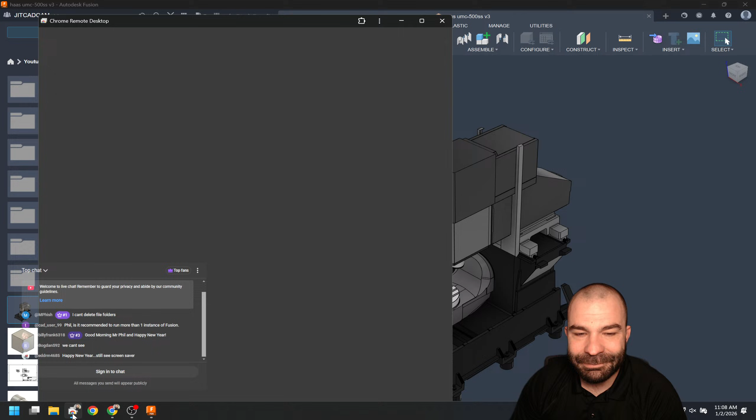I can. So I'm going to start off with the desktop connector. I use Chrome Remote Desktop, I like it, it works really really good for my application. What you're seeing right now is my second computer that I have set up, and that is a workhorse versus the laptop that I normally work on. I can connect to this thing anywhere and everywhere. So you would need 2 licenses of Fusion to do this because you are on 2 separate computers at the end of the day.

Bogdan, thanks for pointing that out. Billy, Happy New Year's. Ed, Happy New Year's once again.

I'm going to leave this open for you guys, I don't have much going on my end. Let me go ahead and get my ticket system pulled up because I don't know if Mike is out there. Mike was messaging in wondering about roasting his setup. But Mike, if you're out there, feel free to send us the file. Back to it guys - any questions, any comments, any concerns, anything that you would like to see? We are here for you.

That's right, I forgot - Fish, you want to know about deleting folders. So if I create a brand new folder, as you guys are going to see, that is now the folder that we want to delete. If I right click, there's what's called move to trash. So Fish, if you don't have the move to trash button, I would tell you we need to open this on the online viewer. Give me a sec here, guys.

I just saw somebody pop in with a question. Now you could see I'm on the online viewer, and this is where we could go in, find that folder that we wanted to delete, and then we could trash it here as well. So you're going to see me move it to trash. Now, if you're the admin of your team, guys, you have access to the trash at any time, and this is where you could go back and recover bad choices that you made along the way, like yours truly. So as you guys can see, I could go in at any time and I could retrieve deleted files.

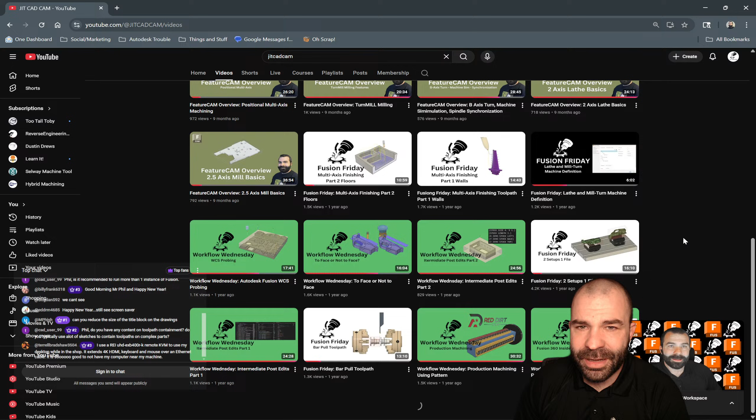I know it's in here, we're going to find it. I do have a video on it for whoever was referencing it. I'm going to try to grab that video and throw it in chat for you guys. Got to remember what it was called, it's been a while, maybe we have to recreate it. Let me go ahead and get OBS pulled back up so I can see you guys in chat.

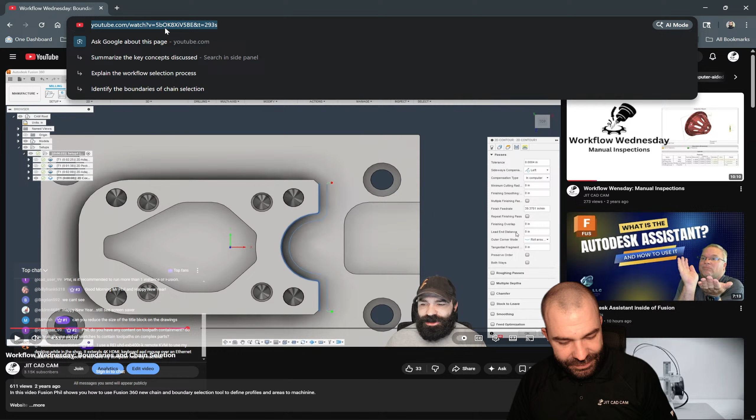Where is it here? Boundary and chain selection. See, I knew I had a video on this. Let me grab this for you guys. See, I can't spell - boundaries, not boundary, boundaries.

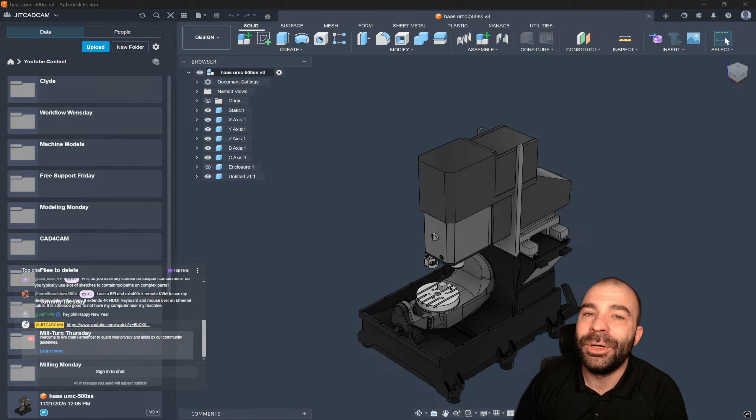Terrell out there says he's using a KVM to use his desktop while in the shop, an extended 4K monitor and mouse. Terrell, I have multiple of those in my house too. Basically what's happening is he's using little dongles you can get from Amazon to run your keyboard inputs and your display from a remote location. Now Terrell, my only opinion about what you're doing is you have to hardwire the system versus using a tablet and a desktop connector - that's my old thing. Run it over Wi-Fi, make your life a little bit more easy, right?

So let's go ahead and look at a drawing and let's see what we can come up with our title block changes. So as you guys are going to see, we're going to go ahead and put this on none other than inch setup. There we go, yep.

The nice thing also, Terrell, again this is just me - let me back up. The bad news is when you're doing remote desktop connections is the fact that if you're posting programs to a thumb drive, that thumb drive is on the computer in your office, right? I just want to make that clear to you. Now this is why we would say network your machine, or you could do a share folder from your desktop over to your actual laptop. And again, that's something I have done here at the end of the day.

If you guys wanted to see this, is if we go into my network, I have my desktop right here. And this way I can connect over to the desktop file repository, and then I could copy that here to my laptop if I had to move that file across the way. Again, if it was me guys, I would just network my machine, it'd be 1,000 times easier.

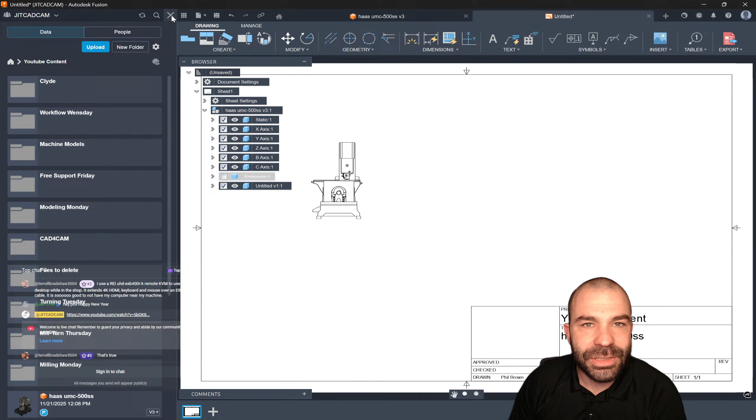So, title block - as you guys can see, we're sitting here looking at a normal setup. Now as you guys are going to see, we can't go through - we could change the things in our title block, but if you're looking to make your title block smaller at the end of the day, what you really need to do is create your own drawing template.

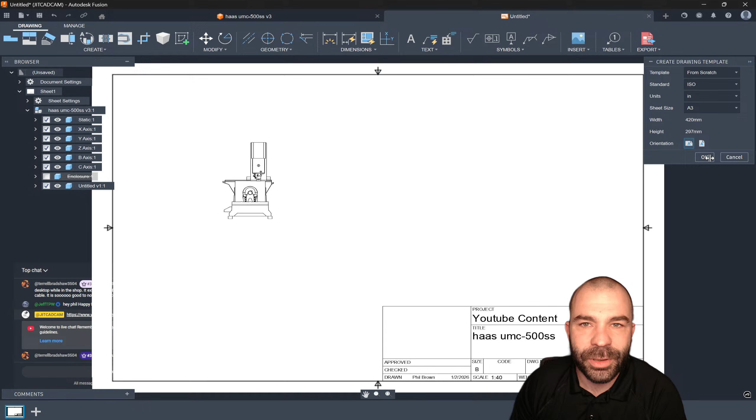So what I'm going to do now is I'm going to say new drawing template. As you can see, we can define our sheet size, whatever size that's going to be. Again, let's get to the American sizing. And with that, this is where you have full range over converting your title block, changing the size of your title block, anything and everything that you're going to need for your actual setup. So again, we could do from existing, or you could go in and go from scratch, or you can import one, all 100% on you.

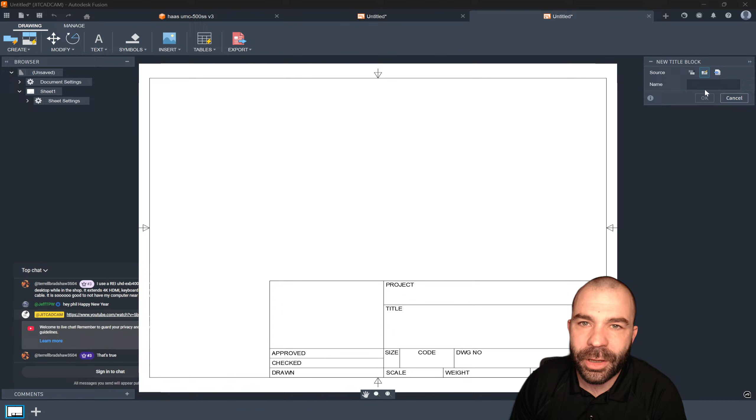As you guys can see, I'm now in the test area to create a title block. Let's say I want to make a box like so, box like so. I'm not going to get too deep in the weeds on this guys - one of these days we'll make some videos on this, but you could go through, add your text. Again, these can be based on parameters if you wanted to call parameters or standard tolerance.

Plus or minus 3, right? And as you can see, I now have my own title block to be able to utilize. So based on that information, my title block is massive because I drew it too big. Had I drawn it smaller, it would have made much more sense.

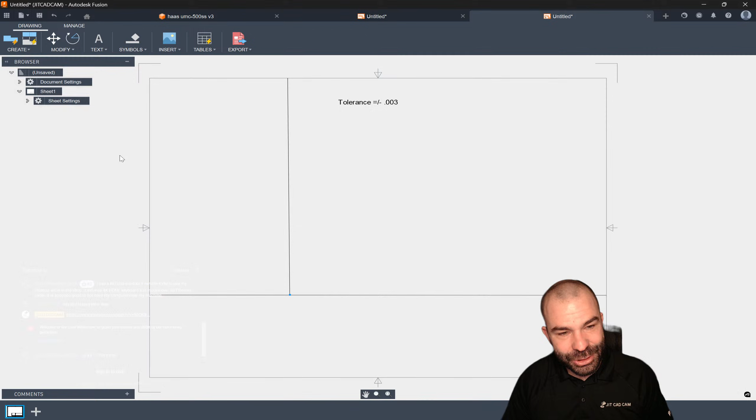So maybe I go back. I'm going to undo this. We should be able to back out of this. What I really need is these lines to be much smaller. Let's go ahead and delete those two. Maybe we just do a rectangle. And what you guys are seeing is this is my sheet size in the background. So something like that, do this one a little quicker because we all know how much I love rectangles.

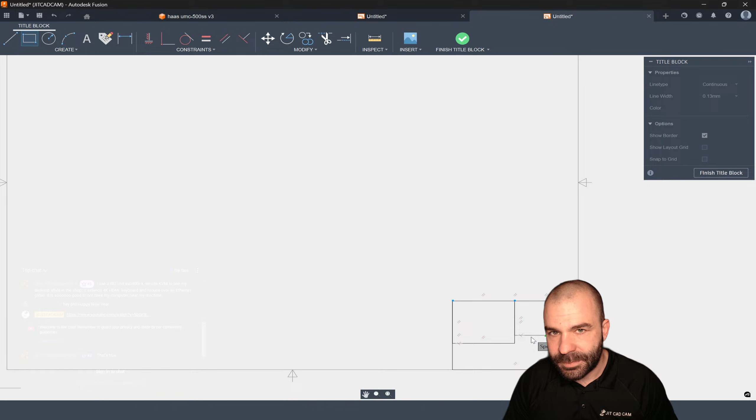There you go. And now you can see I have a much smaller customized title block. So Fish, let me know, does that help you out?

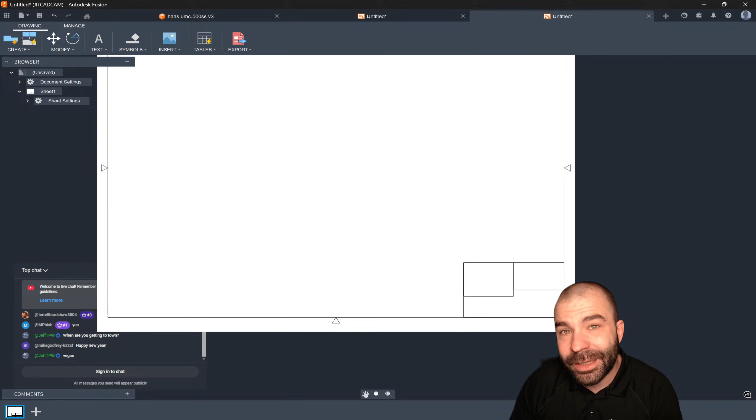When are you getting to town? Jeff, are you in Florida? Happy New Year, Mike. Mike, you made it. Mike, are you going to send me files? Oh, that's right, Jeff, I forgot about that. I don't know if I'm going to make SHOT Show, it's still on the table at the moment. Jeff, if you want me to come do a couple days of training, I'm not opposed to you cutting me my favorite thing, which is 2 blank checks. Second favorite to Busch Lights, of course. It's still up in the air, Jeff. I don't know if I'm going to go to Vegas or not this year for SHOT Show. You guys, if you didn't know, SHOT Show is in 2 weeks.

You can send it, Mike, if you're doing so real quick, and for anybody else out there, if you guys want to send us a file, there's 2 ways to do this. One, you can go file and export. This is going to be an Autodesk archive file, and then send us that file via the support email down below.

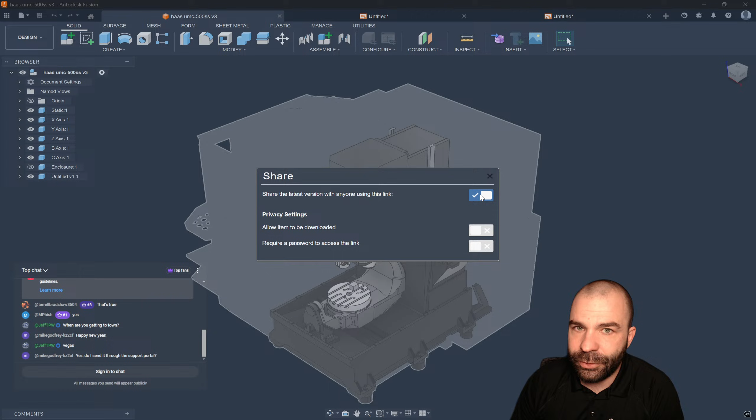Or you can do what's called a share file link, and make sure you turn it on so that it can be downloaded. As you can see, I have download turned on, and then you can copy this link. Let me know guys, can you put links in chat?

Fish out there, great question. If you have a machine with a 17 tool mag, but your tool library says 50 tools, can you renumber tools but keep the H value of said tool? We're going to go ahead and take a look at that here in a minute.

So Terrell, I feel like I get this question so much. I got to say, this is probably the number one question, about ITAR compliancy. I have not heard anything, and full disclaimer guys, don't make any financial decisions off what I tell you. I have not heard anything about ITAR compliancy. I don't know when it's going to be. Do I think there will be an ITAR compliancy? Yes, I think there will eventually be an ITAR add-on, and I say add-on because I think it's going to be like an extension. If I had to put my 2 cents in, again, I have no idea. I do know Amazon servers is what Autodesk uses, and there is an associated charge to be ITAR-only servers. I don't know. But at the end of the day, ITAR Fusion is probably around the corner, but expect an associated charge due to the data storage cost.

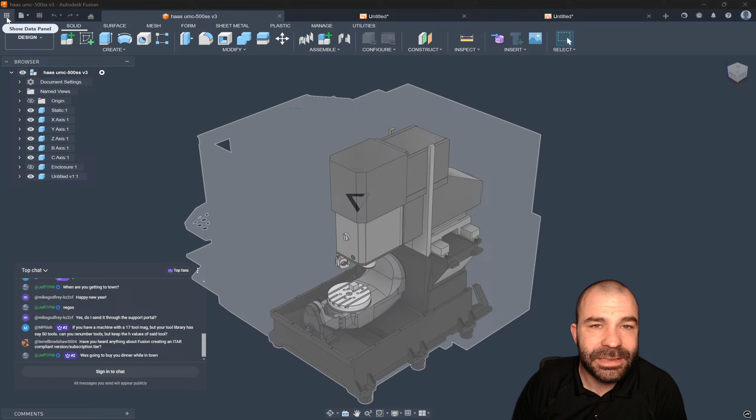So let's get back over here. I know we were talking a little bit. As you can see, MFish has a 17 tool mag, but your tool library says 50 tools. Can we reorder just the tool number and not the length values? Let's take a look. Fish, are you talking about a mill or a lathe? Because this could make a difference. But let's just go to my TL1 where I have some, actually, we'll go to the VF2.

I got some throwaway tools here. Now, if you guys didn't know, you can renumber your tools at any time.

This is going to answer your question right off the rip: do I want to update the length offset, the compensation offset, or just the diameter offset? So I don't want to mess with diameter or compensation. As you're going to see, 1 through 8, but if we look at my diameter offset and length offset, that would be the one that's updated. So yes, at the end of the day, we can update one without the other.

Now, there is a difference because you have the number of the tool, the diameter, and the length. So we got to make sure you're updating the right things. I would assume we need to update the length offset without possibly messing with the diameter offset.

So again, we could renumber those. I'm not going to renumber mine because it just gets messy at that point. And what we're looking at, if you guys are wondering, is the fast way to do it at the post processor, so you have tool number, length, diameter, things like that.

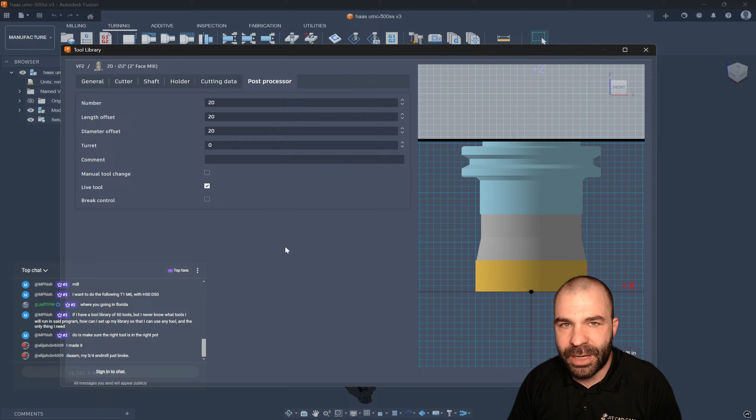First and foremost, if you're setting up a tool library, here's a couple ways I'd recommend doing this. In this use case on my VF2, this would be the tools I'd have in my machine. Personally, my face mill might be in my second to last pocket, so I'm going to put this in pocket 20. Let's say my VF2 has 21 pockets, meaning my probe is probably going to go in pocket 21.

This is a generic way to do something like this, and it works quite well. On a Haas machine, you can have up to 200 tool offsets. You just got to make sure the tool table reflects which one is in what pocket. So this is more like standardized tooling on the machine - I never take the probe out, I never take the face mill out. There might be a handful of tools you also always keep in your machine. That's how I'd define setting up your library.

Now, from that, you could have a shop crib. A shop crib is 100% here at your disposal to grab on the fly. What I wouldn't recommend is having tool numbers associated to things in your shop crib. This does lead me to a point - can we start with number 0 and increment by 0? You can. This is awesome.

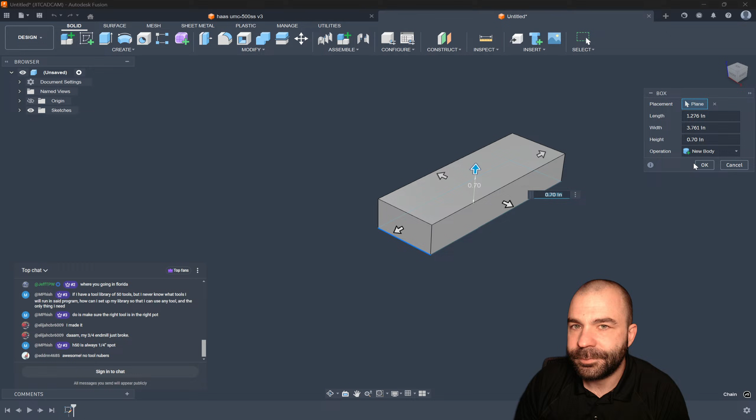So what I just did there is I cleared out my tool numbers. If I need to pull a tool from my shop crib, or my catalog so to say, there's no tool number associated to it. So let's create a quick part to put a toolpath on. Now from that, we do our setup, we're going to go ahead and do milling, and let's say we're going to do a 2D contour around this part.

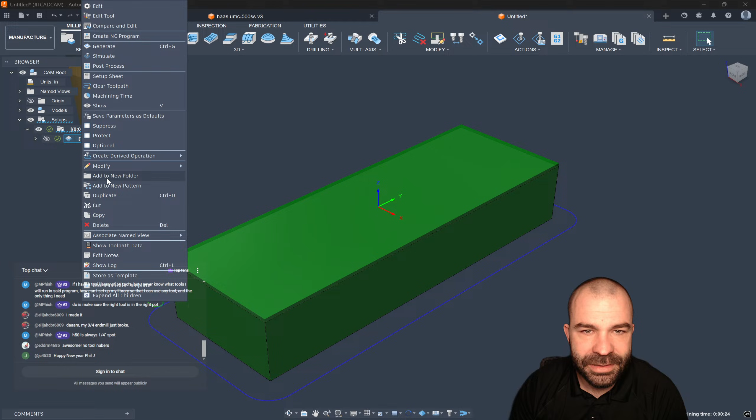When I pick my tool in that shop crib or mill library, you're going to see upon selection it's automatically going to give it tool number 1. The neat thing is, in the event that we already defined other tools here - let's go ahead and delete this toolpath, and I've got to wipe the library here. As you're seeing, I'm going to delete this tool out of here.

There we go. Now let's say new example - I go in 2D contour, I pick my tool, again going off the machine this time. That's why I have a machine versus like a catalog to pull from. As you're going to see, even though this half inch is tool 4, if I come back and pull a non-machine tool - so again we go back in here, I go to my catalog, let's say we're going now for a 2-inch face mill - what's going to happen is it's automatically going to put that back to whatever open pocket is in the machine.

This is why, on most machines, what you tend to do - and this is my preference - is keep the higher pocket numbers as my standardized tools: 3/8 spot drill, and somebody said something about H50 always being a 1/4 inch spot. Yes, spot drills, standard end mills, they all sit in the higher number of my tool range. They don't need to be tool 100 in pocket 20, but that means if I'm operating that machine, I might not know what's in pocket 1 through 10, because those are what I'd call my disposables or hot swappables.

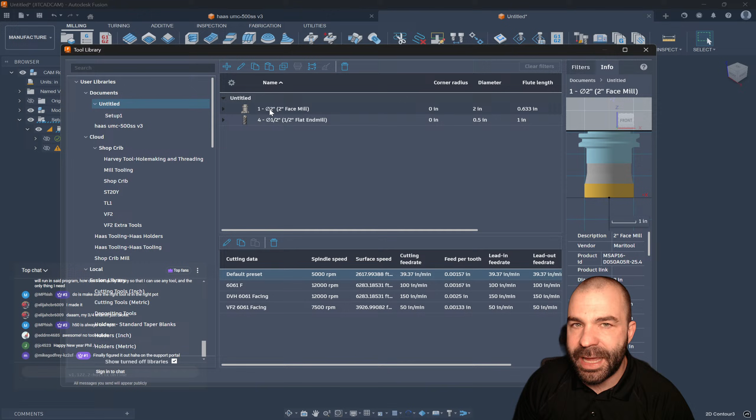Now let's say you run this at the end of the day - you could always come back into your file and copy any tools that you had in that 1 through 10. This is just a scenario. We could post them back into the VF2 folder so that next time round, I now know the 2-inch and where it lies. So I may now go down here to tool 20 and delete this one.

And this is just an example. This is a lot of extra steps. This is why I'd tell you guys: if you have 21 pockets, set up everything above 10 as your standard tooling. Everything below 10 is no longer standard, which means pocket 1 through 10 is always open. Just makes life a little bit easier.

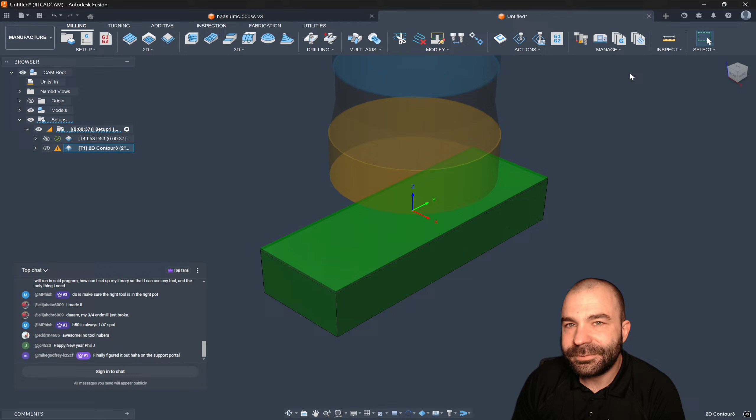Another trick I'll show you here. Again, some people don't realize this. If you're hammering away on parts, what you guys are seeing me do is I'm going to just draw another part here real quick.

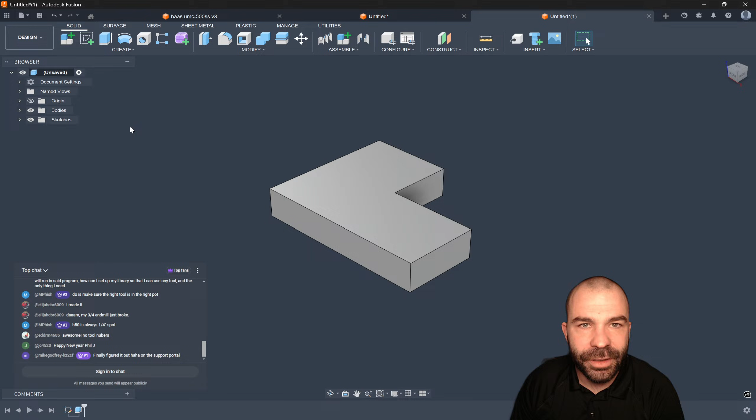And I'm jumping from file to file because I've taken on a bunch of contract programming for $150 an hour. If you still have a file open - so again, this first file is still open - I'm moving on to my next task of the day. Once I start toolpathing this, the same kind of rules apply.

If I go in and say I want to face this part off, if I select a tool right now, it's only showing me the file I'm in. But the cool thing is I could go back to the other file here and pick that face mill once again. Right now these are running on my VF2. I'm just trying to get ahead programming that machine. I'm pulling tools across setups or completely different files, making my life much easier.

This is a trick that I use. Now, let's say you run 35 parts and tool 7 was probably used on the second part. Who knows what tool 7 is at this point, right? We could always just pull it out of the machine and get it swapped out.

Mike Godfrey, finally got it figured out. JC, great to see you. Happy New Year's as well.

Yep, Ed, 100%, man. I had no idea we could reorder it with all zeros. That was something new I learned today myself as well. The all zeros move keeps you from causing your own demise later.

So let me get back over to the support portal real quick. I am going to show you guys. Let me do this here real fast. Put you back on my beautiful face.

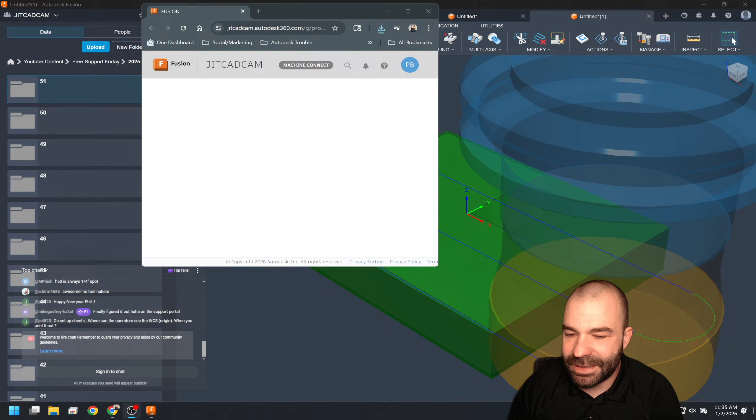And as you guys can see, I can't move this folder, right? But we can if we go to the online viewer. Again, let's get this all loaded up here real quick. You guys can see I'm now in the online viewer. I scroll down to number 50, not click on 50.

All the way down to 51. We're going to do a move, and we're going to get that positioned over into the 2026 folder. So again, here we go. And just like that, we should be good to go. So let's refresh. 51 is gone. 2026, there's 51. Let's go. Let's get this file uploaded now.

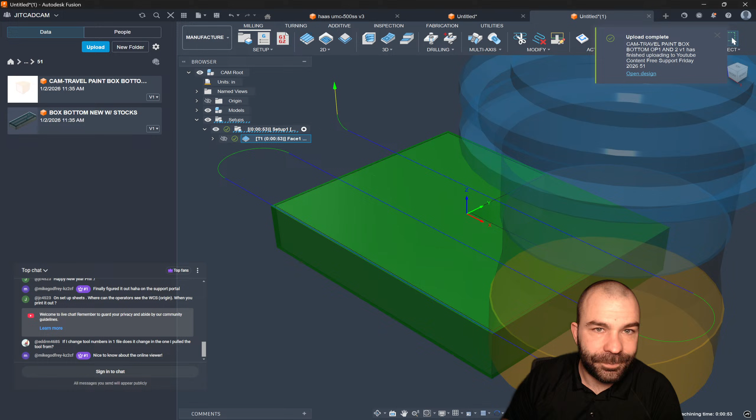On setup sheets - oh man, why do we got to get setup sheets? Where can the operator see the WCS origin when you print it out? So give me one sec here. We're going to go ahead and get this file opened up real quick.

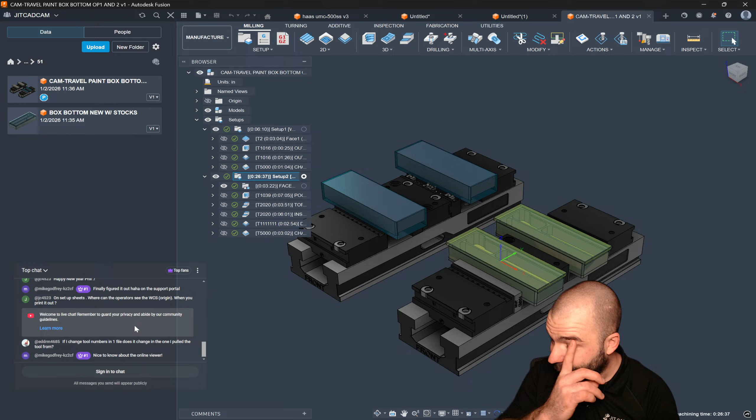Now, for the record guys, Mike out there is requesting to be roasted. Don't take this as offense, as he has said. I do need to pull up the support ticket. First attempt with Cam - well Mike, that's good, man. I'm glad to see that your first attempt with Cam. Now, I do want to ask this question, but I also don't want to ask this question. Mike, did you watch my videos before you did this? Because if we get in here and there's a bunch of messes here and you watched my videos, we got other problems.

So, as you can see, he's got setup one over here. It does look like he is doing things right off the rip. This is what I like. He is utilizing quite a strange WCS location, but we could talk about that more in a moment.

Yes, as much as possible. Okay, so you watched a bunch of my videos. So Mike, there's a couple of questions. One, right off the start, you're trying to run two parts from one work offset.

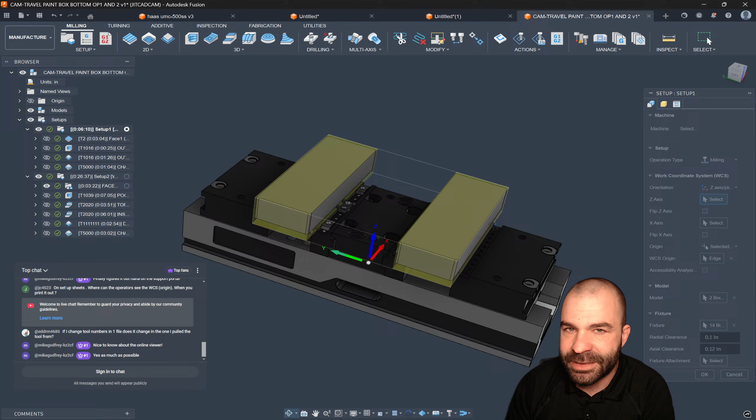I'm going to look at this a couple of ways, but just know I don't know what your plan was with that WCS. If you're going to do this, guys, what I highly recommend is milling a feature in the center jaw that you can probe off of or use as your WCS origin. Again, the idea would be is to put this between these two.

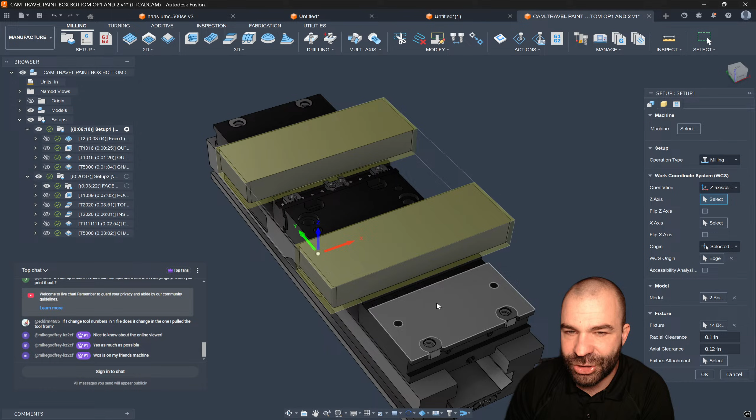And for you guys that don't know, this is a double action vise. So both outer vices move in and move out. Or in this case, this might actually just be a fixed station with your inners and outers, and then he's using like Mitee-Bites to hold down.

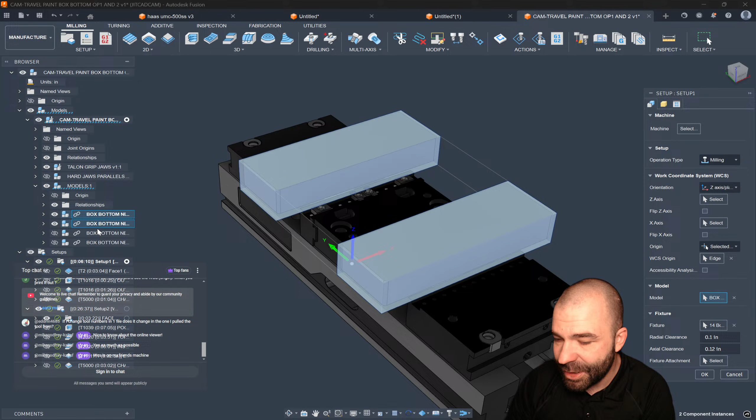WCS is on your machine. Okay, cool. So again, he's using bodies here. Nothing against him, not a big fan of the body selection. As you can see, he has components to his advantage. So why he wouldn't just select component and component versus bodies, not a big deal. Not a huge deal. We'll find out later if this bit him.

Let me go ahead and cancel this before we get on to our next thing. WCS, he's using bodies, that's my only complaint. The vise is also in bodies. That would be a complaint. Now, stock size from solids, still bodies. Again, components would be the way to go.

Everything checks out in his setup. So let's go ahead and let's simulate this. Let's see what we have going on.

So we got our facing on block 1. Then we jump over and face block 2. That looks good. Outside profile, pretty simple tool path here. So he's making his finishing pass now. So he did do adaptive around the outside, and then he's doing a finish pass. And then it looks like he's chamfering his upper edges.

So everything in your first setup, in my opinion, Mike, it looks good. I don't see a big problem here. Everything checks out. I think the only recommendation I would make, and I think a lot of people miss out on this is...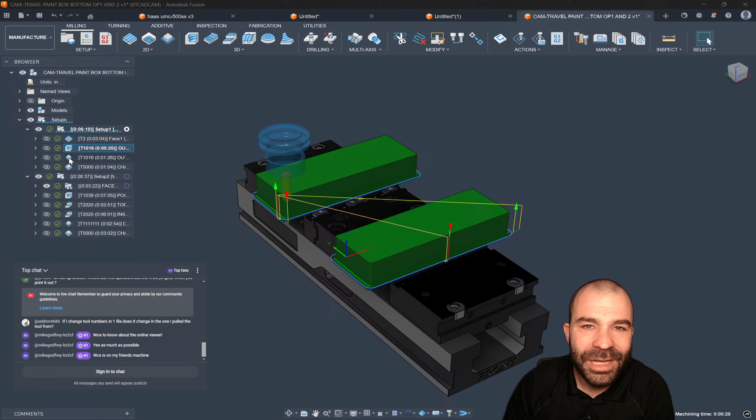As you guys saw around this part, if I turn on stock, and now this is, again, as you guys can see, it's trying to grab a box around everything. I would need to pull, let's see what he has. Challenge, Jaws, where are you hiding your stock? That is the true question here.

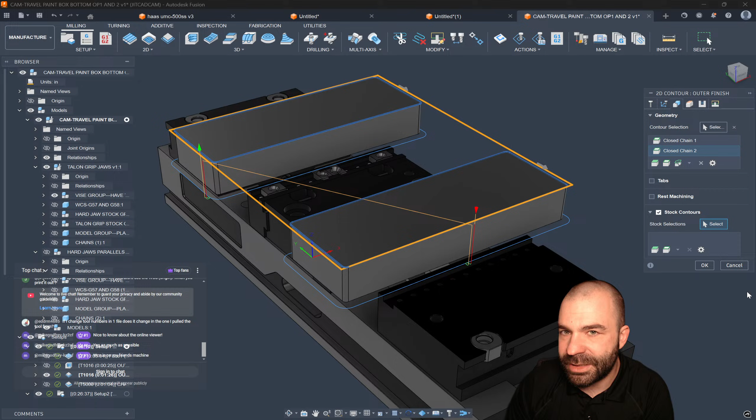Change vise group. Let's do this, hold on here real quick. Might be easier to use. Show all components, show all bodies. There we go. Where is your stock hiding?

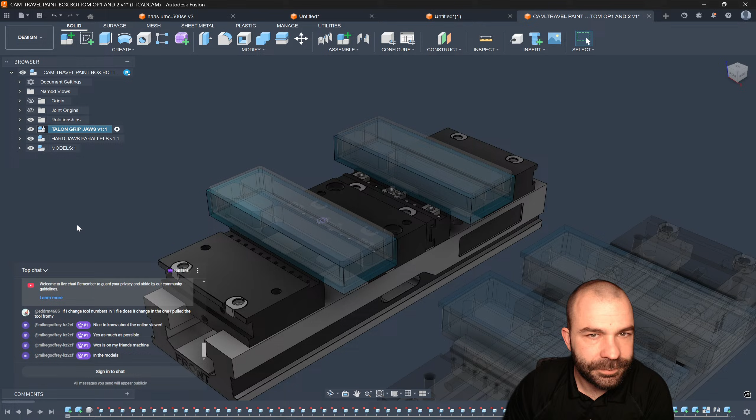Or are you using a sketch? Oh, you have a solid in there. In one sec, guys, we're going to go show all. Is that supposed to be your stock there? Because your part is sitting above your stock. Or am I crazy? Could be crazy.

Okay, here's your models. In the models, yep, okay. So I assume this is supposed to be your stock, right? Which this is going to be kind of why your stock is smaller than your part is a little goofy.

But let's go back to manufacture and take a look here. Because this stock looks correct here. So that's what is making me wonder. We'll track it down, we'll find it, guys. Oh, you got it, okay, I see.

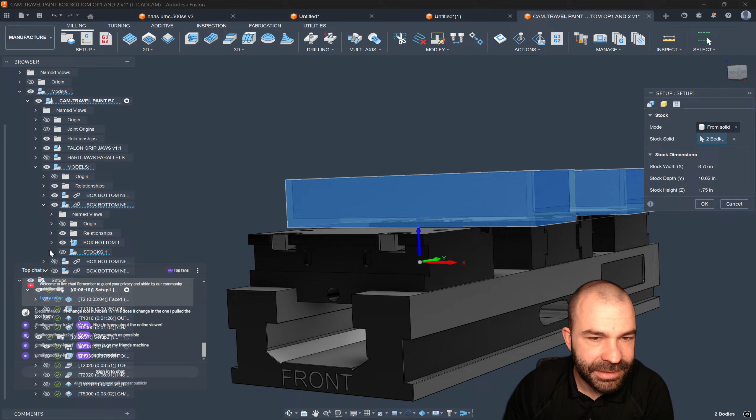I see, okay, so... cancel. This is why organizing your tree is very, very important at the end of the day. Go.

Yeah, okay, so Mike, and for the rest of you guys out there, I knew I was going to get to this point, and I knew it because he's using bodies. Mike has created a setup one stock, and then he's got a rest stock in place here. And there's going to be a problem with this and why it's going to bite him.

And I know why it is. Now I'm making an assumption here before we get there. Okay, so what I'm really looking for is if we get the stock turned on, that's our pre-op stock.

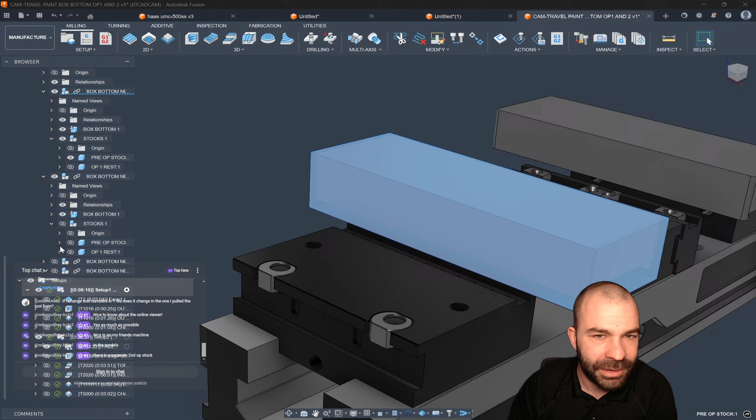And then I assume you have one on the other one here. So let's get that other pre-op stock turned on. Okay, so I need these two.

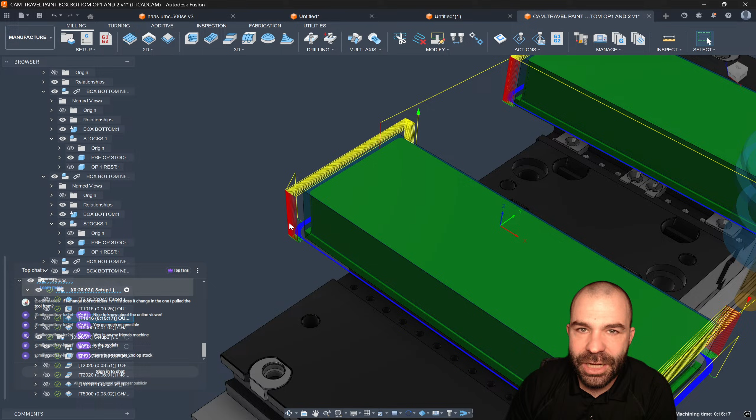The reason why I need these two is because, again, if we use stock contours, I could pick the upper edge of both these boxes. And what that allows me to do is actually use something like roughing passes on 2D contour. Now, if you plugged in 20 passes at whatever your step over is going to be, you're going to notice it's going to automatically trim that based on the stock box. This is what I was chasing after, right?

So this is kind of nice when you think about the fact that, hey, instead of doing adaptive clearing, I could have used roughing passes because I'm not taking a lot of material off the outside of these square parts out of square material, right?

Now I notice you guys probably can't see that. Let me go ahead and get this moved back up to the top for you. So again, instead of adaptive clearing, you could have used 2D contour for finishing, but used roughing passes in 2D contour. That's all I'm pointing out, right?

Now, getting into your second setup, this is where you had to generate your own stock, right? And this is where I know where the holes are to the system. So let's do this real quick.

I'm going to show you a way to make your life easier on some of this, but I want to run through the rest of your toolpaths because I like your toolpaths. I think your toolpaths are going to be okay.

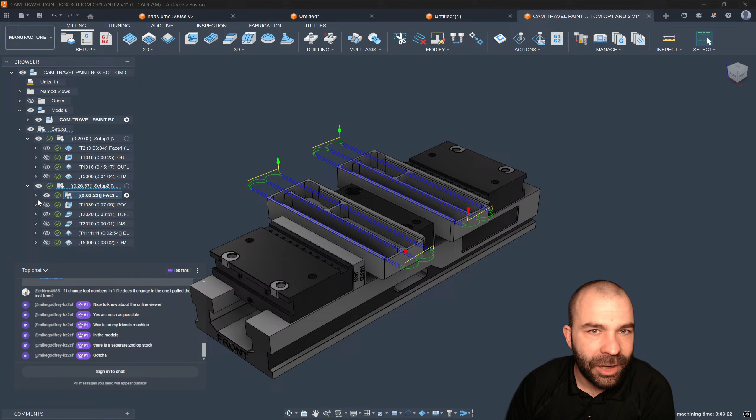Now I see you have a pattern for your facing. That's fine. You then are roughing these both out, again using a flat toolpath, using another flat toolpath for the inside. That is two different tools. That's fine. Again, another toolpath - actually, no, same tool, two different toolpaths.

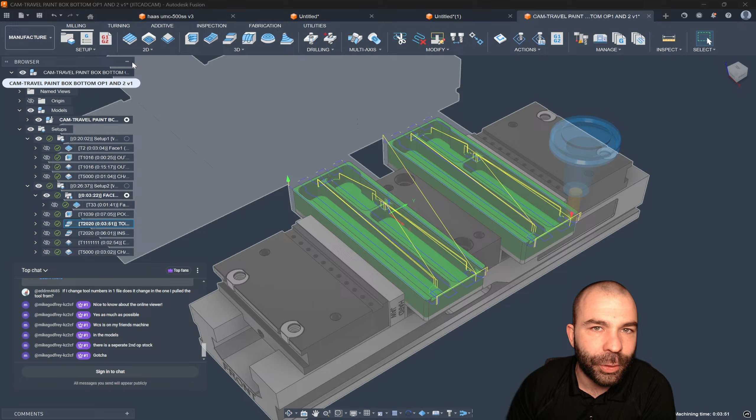I don't know why you broke that down into two. Maybe you could have done them both at the same time. Not a big deal. Again, now finishing out the areas inside because there is a dovetail. And lastly, you are now going around the outside to deburr your part.

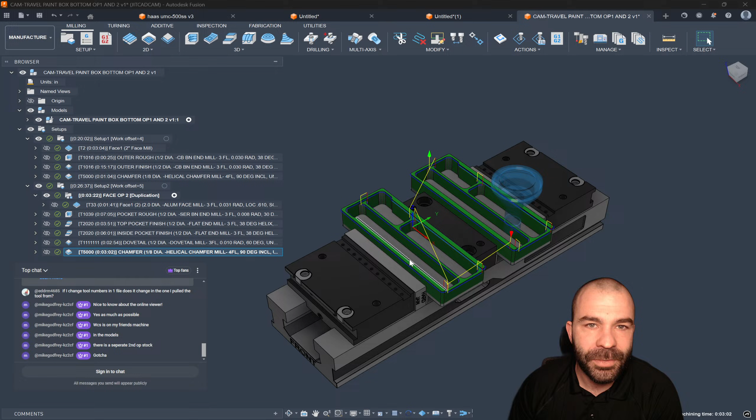Cool, so toolpath-wise, right off the start, everything looks good, right? Great toolpath, great time through. I think you achieved the task of making the part. Now, recommendations I would make, right?

First and foremost, let's go back up here to our first setup, and let's kick this off the way that I think I would have done this. First and foremost, we're not going to use bodies - bodies are going to get us in trouble.

And what I'm going to do is I'm actually going to go through his tree here and hopefully find his parts. So we have our box number one here, and then my stock from there is - let's go ahead and grab my pre-op stock, right?

So as you guys are going to now see, I'm only doing the one part, right? Which means these toolpaths are going to need some adjustments here real quick. Again, give me a quick second here, guys.

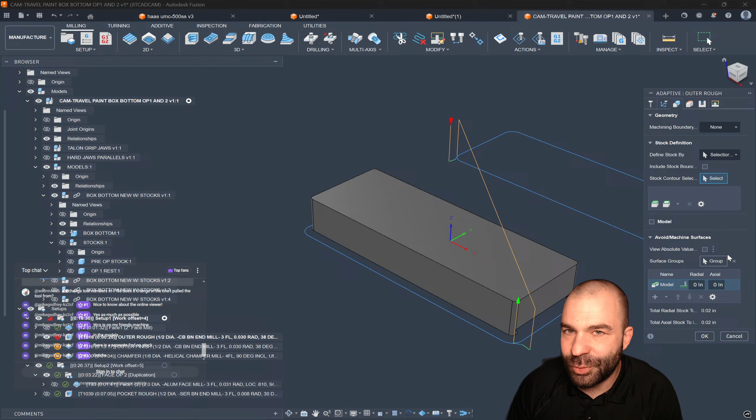We're going to go ahead and remove 3D adaptive. Nice, boom, boom, boom, boom. Again, what I'm going to do is we're just going to delete this because I'm not going to spend a bunch of time trying to troubleshoot it.

We are going to remove stock contours. I'll turn it back on here in a minute. Boom.

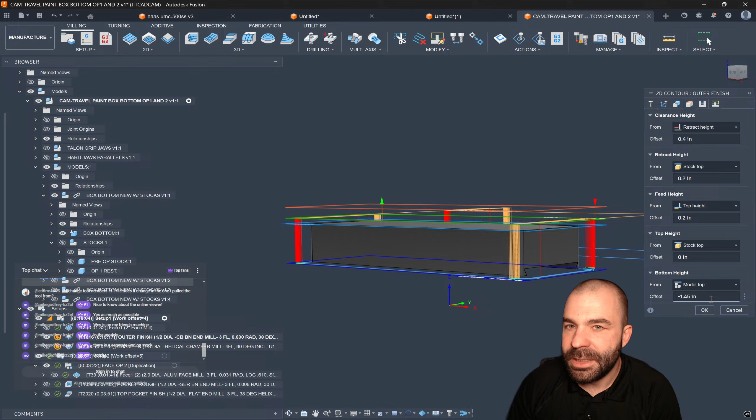Go top edge, model bottom. Oh, model top minus 1.45. Okay, so we're back to a couple of toolpaths on here, right?

Lastly, we need to delete that. There we go. So now, if you guys notice, I've only programmed one part, right? This is the trick that I would teach somebody, is taking these toolpaths that I want and now doing a pattern.

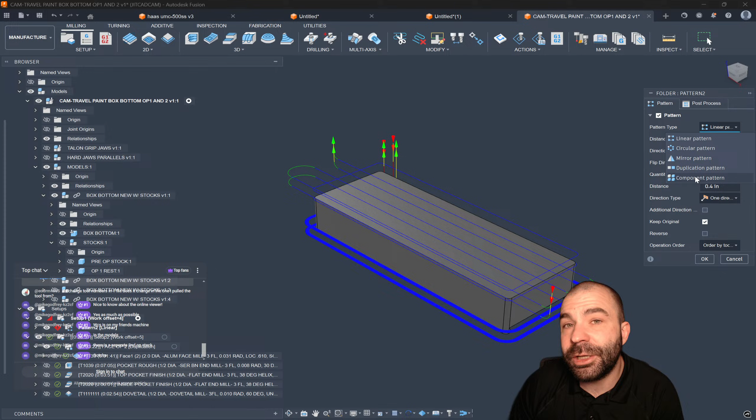But there is what's called a component pattern. This is why components beat bodies any day of the week. If I go back down to a second part here in this tree, we're going to go ahead and see if we can't get it turned on.

I can now say I don't want automatic pattern, because if I pick this part, automatic pattern looks at all four of these versus doing only the target that I select. So now you're seeing we are going to do both these parts. Again, I've got to minimize stuff here so you guys can see this. So now setup requires part one, but the component pattern is handling both actual physical machining capability.

So again, because I'm doing this way, this is where the magic happens. If I now jump down to your second setup, getting rid of bodies, we're going to go back into our component tree. If you modeled these correctly, which you did with a copy and paste, not a copy and paste new, that means bottom box here. And if we go to our bottom box, this number should be the same.

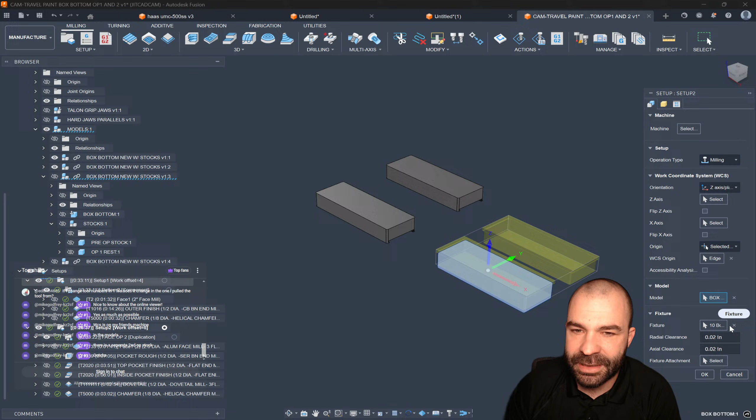This could be a little tricky here in a second, but what we're going to see is our stock could now be from preceding. And if everything goes right, you'll notice how my stock has automatically generated. I'm not using on my second setup his stock CAD model. Mike, let me know, is this looking pretty good for you?

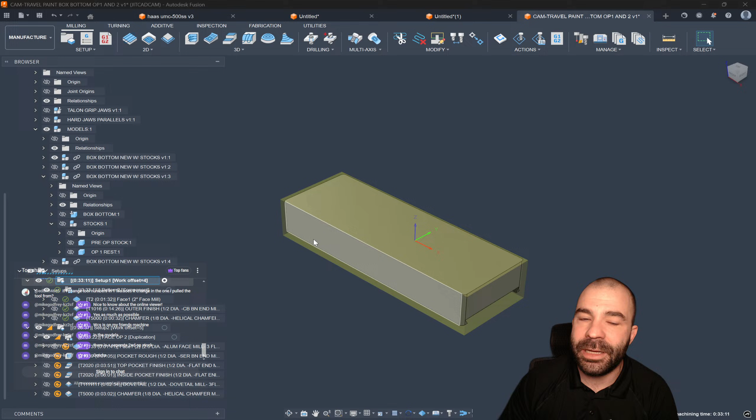So again, I'm doing this very simplistic, guys. I did not put any of the jigs and fixtures in here yet. We're going to add those back after the fact. But the big change that I am making on his models or his setups is I'm using a component for the model selection, because if that component matches into setup 2, it allows for my stock to automatically carry through from preceding. Again, pro tip out there, guys, check this box, please. Go ahead and hit the 3 dots, save as user default.

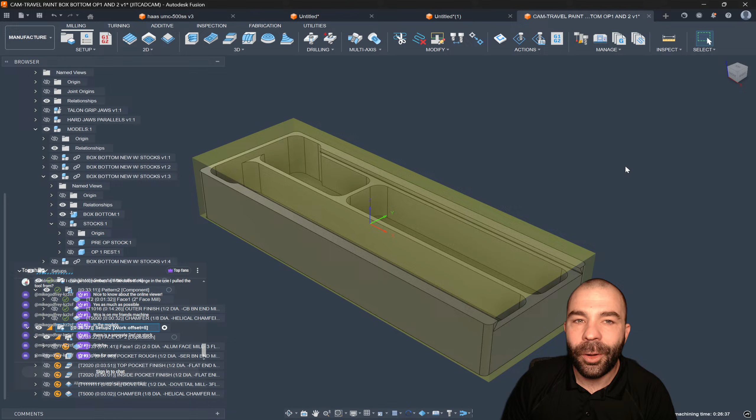Now, Mike, let me ask you real quick. I bet you are kicking yourself a little bit because you probably spent a lot of time developing these stock bodies that you were trying to use, that I just overrode the system simply by picking a component versus picking the model, the physical body in the model.

So again, we no longer need this pattern that he's got here. Give me one sec here. Let's get our toolpath out of the pattern. Let's delete the pattern. Again, there is our facing procedure. We're going to have to, again, I don't think I'm going to spend a ton of time trying to wrangle this down, but as you guys are seeing, let's just leave that the way it is. Should pick up on only one part. But the same rule applies, right?

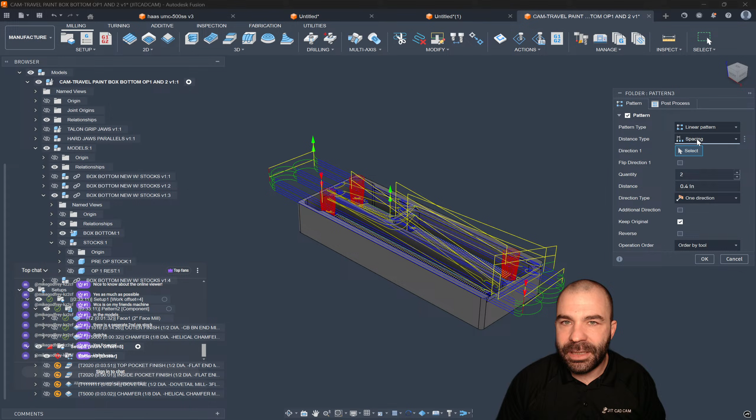So again, I'm going to take the toolpaths once they're good known toolpaths, go back to setup. We're going to do a new pattern. And again, this is a component pattern. I can't stress this enough. We're going to turn off automatic. We got our source. We go back over here to his design tree. We're going to go ahead and turn on the second one that we can pick the one to go to. And just like that, again guys, for demonstration purposes, I'm going to rip these other toolpaths out and minimize everything back up in my tree.

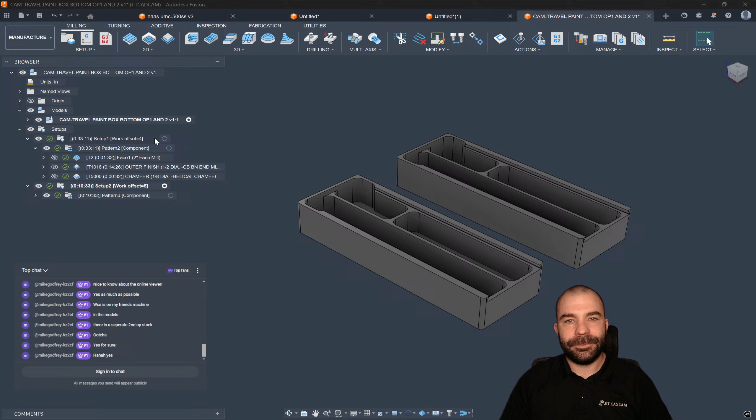So again, setup 1, setup 2. But if I go down to the pattern, as you guys can see, I now have a pattern to do both these parts. This is the magic of everything with components. This is why components are your best friends. If you're going to lay out 30 parts and they're all going to be the same setup, as you can see, components are the way to go.

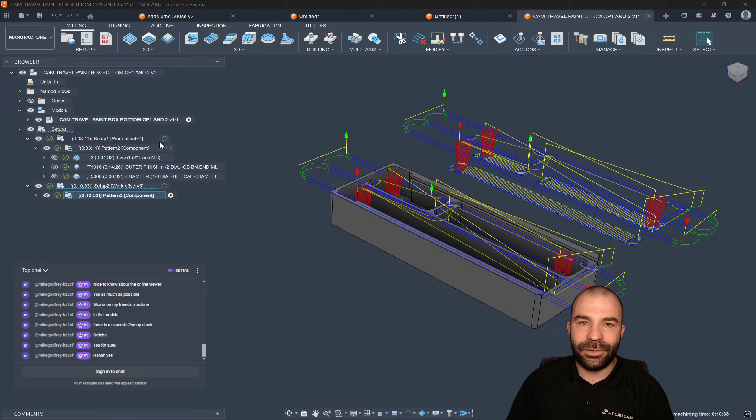But let's go back and fix a few things. So now we go back to our setup. We can easily go to our fixture. Again, this is where your organization makes all the difference. As you guys can see, we're going to go through and try to figure out, there's our vice. So that is going to be our work holding. And just like that, I've now fixed that for our work holding.

Again, we have our pattern of 2 items. Now we're not going to see that other part because I have my synchronizations all turned on, which makes it very easy for me to jump from setup to setup. So again, we could fix our second setup here. Going to our fixture, I need to find the fixture for this guy over here, which is the second one here. And just like that, we have both of our items in play. Everything's going to work to our advantage.

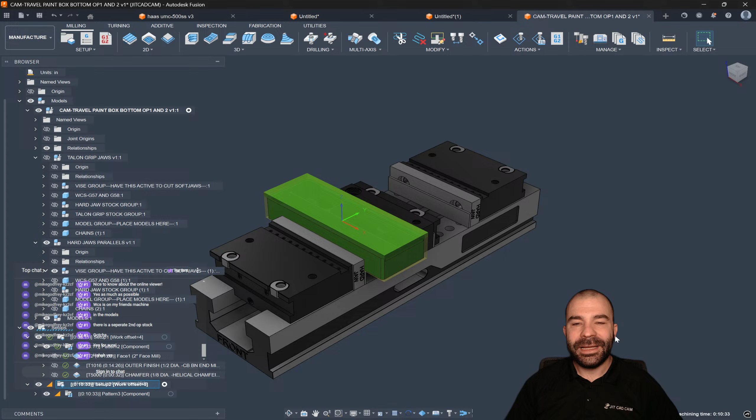Now I'm really going to up the ante here because, Mike, amazing file, you're doing great things. This is a pro tip that I don't show very many people. If you're going to use vice template files, this will make a big difference in your workflow. So let's say visually, I would like to see both of those parts, right? So I'm going to pick both components.

So again, we're going to go in here. I've got to try to track it down in this tree under models. And it's this guy here. And there it is. Oh, nope, not that one.

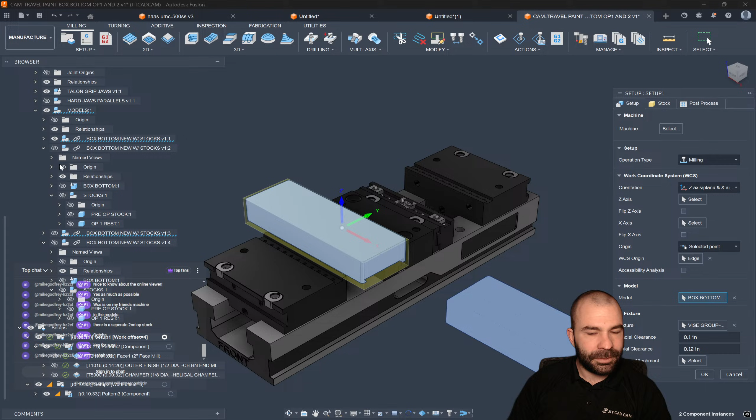It'd be this one, right? Do this the good old fashioned way. This guy and this, right?

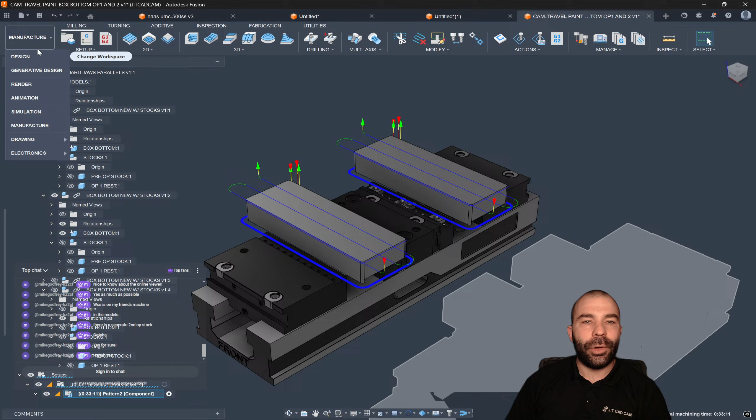So what you're seeing now is I have both of my parts in play. However, this is just visually so I can see it when it comes to that component pattern, right? This is complete representation. Now going back to his design, and this is going to be fun.

Okay, so you don't have it linked. Beautiful. So this is his vice base. What I would do on a dual action kind of setup is I would create a sketch down here on the bottom, and then this is going to be nothing more than a rectangle. If you guys can't guess what this rectangle is going to be used for, this is how I can control all of my tool paths and force them to be on only one side of the vice. This works if you're using 3D, of course.

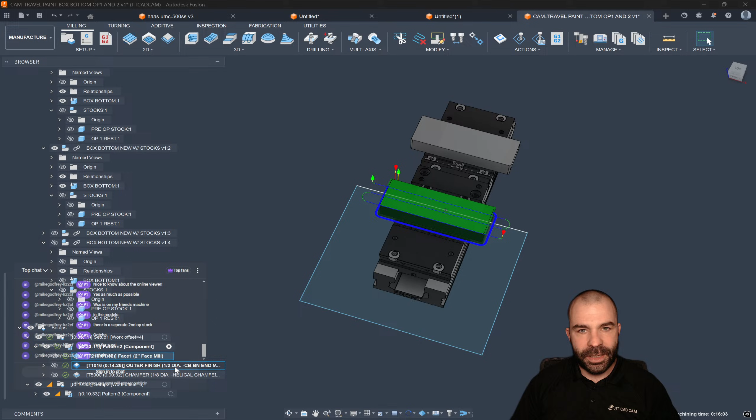So again, let's go ahead and get that sketch turned on, and we're going to work on the front station. So somebody asked the question earlier about chains and boundaries. Again, he's not doing anything in 3D on this part profile, right? But let's say, for example, he was doing a 3D toolpath. So again, kind of undoing everything that he's done here. 3D adaptive clearing, going to get that 1/2 inch tool.

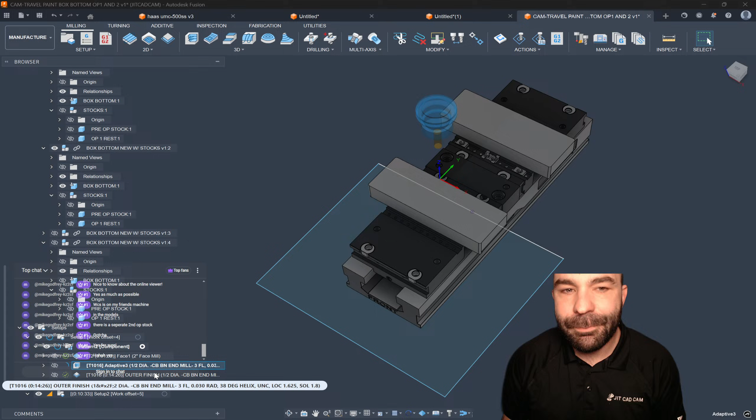And now, as you guys can see, I can do a selected boundary, which is this guy down here. And as you're going to see, we're going to have to drag this up for it to take effect. But I'm now using a boundary on my vice station to retain pushing my 3D only to that front station, right? So again, the whole concept of this boundary down here is nothing more than to say only program the front half. Because, again, my component pattern is handling the second part of my vice, right? It's running everything on that back station based on the pattern. So again, I don't need 3D to jump across both parts right now. I only want it to stay on the front.

So I'm going to leave that there. I'm going to pause for a second. I need a drink. But let me know, guys, what do you think? That was probably a lot. That was a lot, drinking from a fire hose. Mike, you're new to this. I could tell. This is why we have our top tier support package on sale right now.

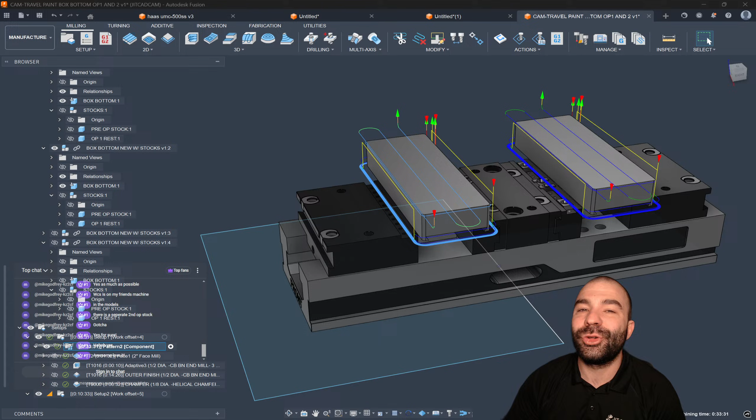But that is the tricks, right? So again, the reason why I'm putting this sketch in place, and I would recommend putting it in your template or your vices, is so that I can quickly reference that when it comes to my chaining and my boundary for my 3D toolpaths, right? Because I'm using it as a containment to stay on the front half of my vice.

But in my setup, I put both parts in here so that if we were to go in and machine this, again, we could do this. So again, we could say stock is both front and back. So again, we're going to go back in here and we're going to try to find his stock here. So here is the stock for the back. And if we regenerate our stuff, we're going to have to make some changes.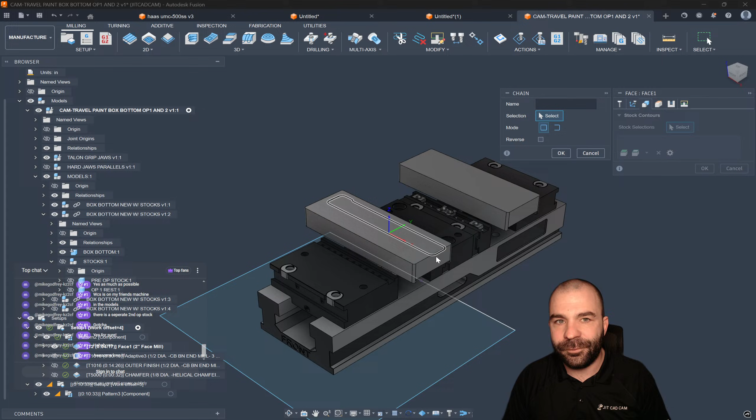Again, as you guys are seeing my facing now, this is why we have that ability to go through and pick our chain for our facing. I'm going to go ahead and cheat the system. And it's also why 3D becomes your best friend, because the containment boundary will force it to stay only on one side, and so forth and so on.

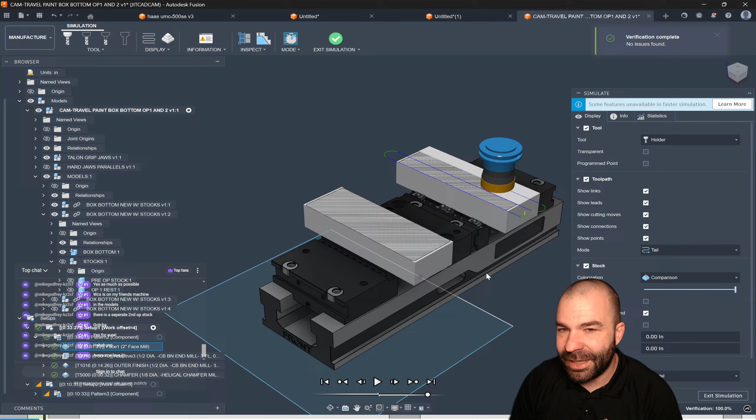Now, if we simulate this, I'm actually curious to see if this is going to work. Will we see machining on the back vise? And look at that. We now have stock in play for both parts so that we could see the stock update in real time and make sure we're not missing anything on one versus the other. Again, in my setup, what I did at the end of the day is I defined both parts as components, and I defined both stocks, but we only toolpath the first position.

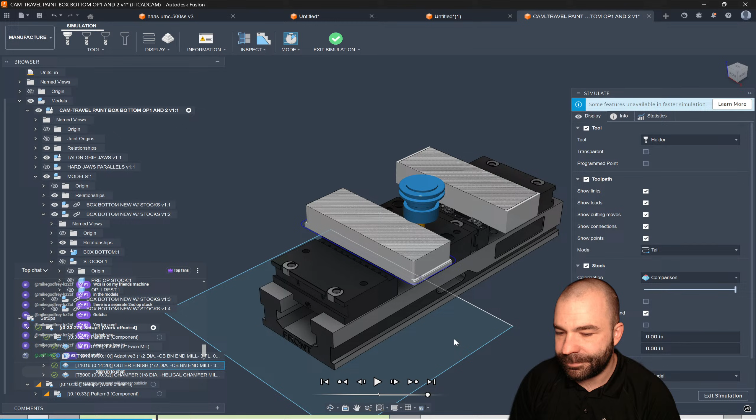Let me know, guys, what do you think? Is this the time where I get you with this real quick? You learn something new? If you learn something new, do you want to sign up for a monthly membership? Buy me some beers, lobsters, steaks?

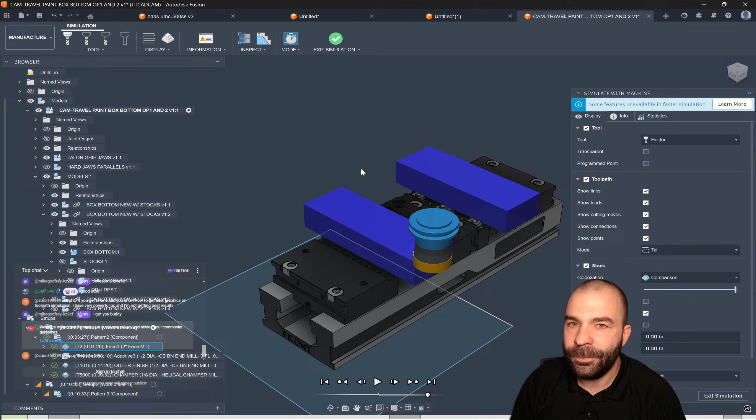Stuart, one thing is, and this only works on milling, you don't want to do machine simulation all the time. So simulate with machine right now, we don't have a machine in here, but as far as I know, unless they changed it, you're not going to have that simulate with GPU button up here at the top. So you want to make sure you turn on simulate faster GPU. This will allow, as you guys are probably going to see, I have my comparison cranked all the way up, which means if I hit play, I can rip through this really, really fast. Mine is updating almost instantaneous because of things like that.

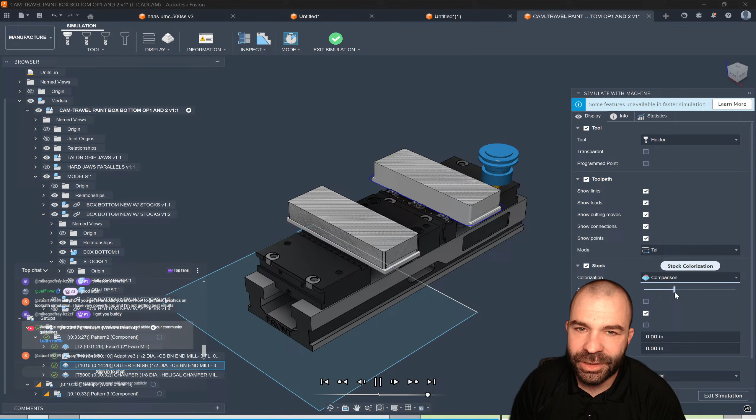Now, if you want to simulate and you're not too concerned about the graphics, this is where you need to turn your accuracy down. Again, even on my PC, you'll notice everything is kind of updated much faster once I start to turn the accuracy down.

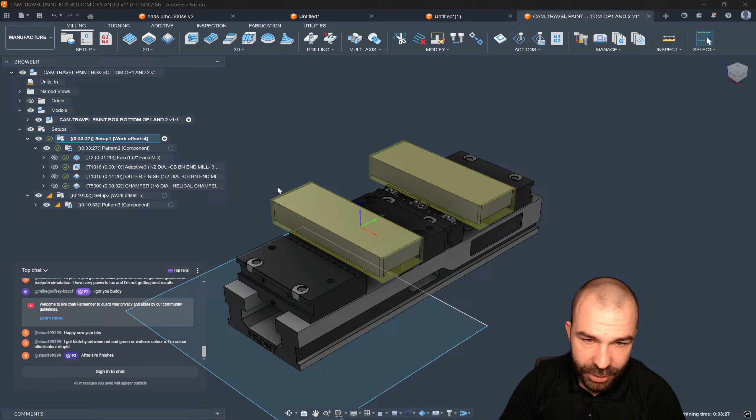Another tip I'd give you guys if you're dealing with simulation: one, make sure all your check boxes are minimized. All these green little check marks are your stock generating as we work through this part. Right now I don't have mine turned on, but if I hit F8, as you guys can see, as we work through this part, automatically the stock is updating and simulating only the toolpath that you need.

You don't need to simulate everything start to finish. I think a lot of people confuse that. We don't need to simulate a whole program through yet if I'm just working at getting this part down where it's going. So I don't need to go up to setup and simulate, I could just pick one or two toolpaths and only simulate those, as you guys are seeing me do here. This makes life much easier and much better to quickly get good results at the end of the day.

You get blotchy between red and green watercolors. Yep, so a couple things, I do know what you're talking about, getting more into that. If we simulate this and go ahead and hit play, we'll get it all the way to the end real quick. What you're referring to is stuff like this.

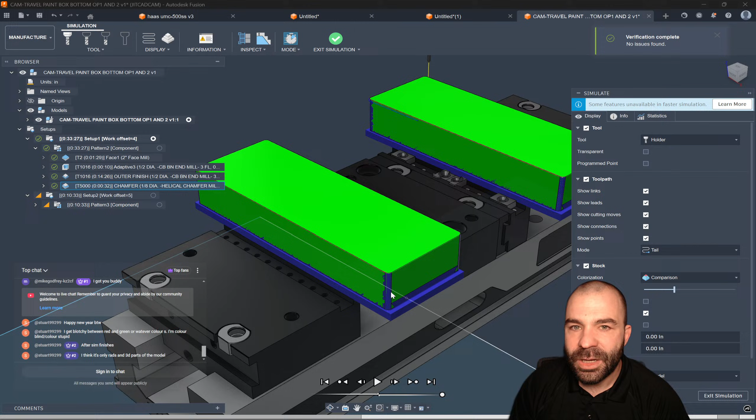So as you guys are seeing, I have some graphical surfaces all over the place, but a few things you can adjust. If you look down here, my leftover stock and my tolerance are both set to 0. I would need to crank my accuracy all the way up and let this regenerate. Give her a sec here, and you notice how it's gotten better.

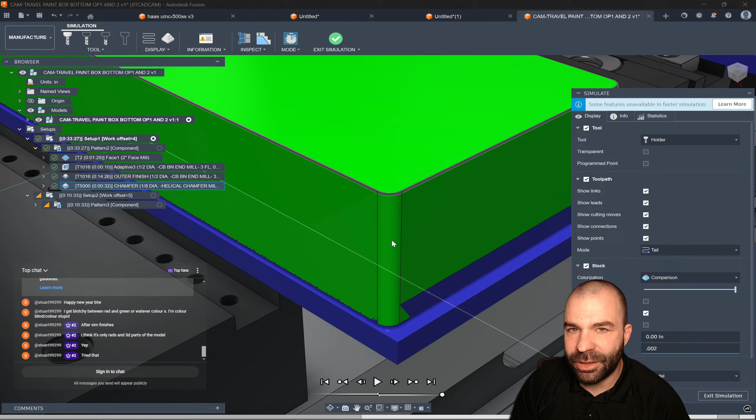Now if I turn my tolerance up a little bit, this is how close the tolerancing of that model is going to get. As you guys are seeing, I turned it up a little bit and it's gotten a little bit better. If I go a little bit more than that, or add just a little bit of leftover stock, sometimes it'll make a pretty dramatic difference on what you're seeing.

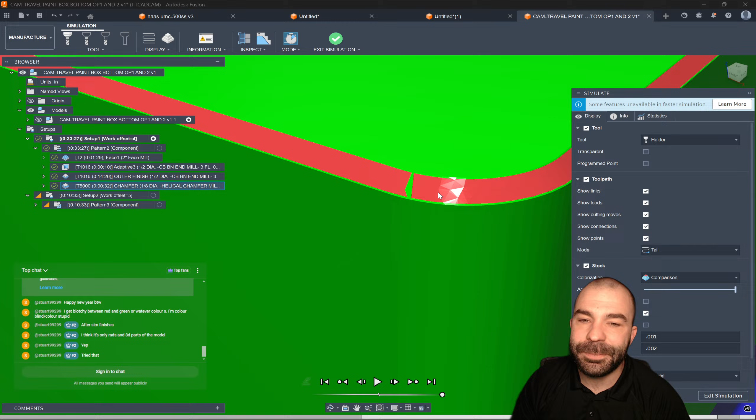Now the blotchiness, this just comes with the territory for you guys. If you're noticing, I get zoomed in here and I'm getting little triangles, that's a mesh in the background being generated. So you have kind of a stair step effect for that kind of part when we talk about the stock. It's not a big thing to worry about. I have my accuracy turned up, and I could increase my tolerance a little bit more, just like when dealing with tolerancing on toolpaths, and you should see some better, cleaner results.

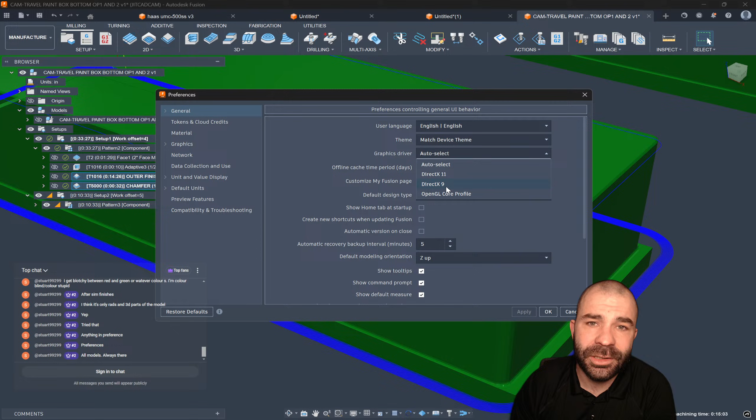Preferences - there's not really a lot of preferences that I would recommend changing for you guys out there. Keep in mind under your general settings you have your graphics driver itself, and there's the ability to go down to the bottom where there's compatibility and troubleshooting as well. But at the end of the day, there's not a lot to tweak here that's going to make a giant difference. For a while, jumping back and forth to DirectX 11 or DirectX 9 was helpful, and if you were on a professional level graphics card, OpenGL was helpful, but not a huge performance difference - this was on older machines. I haven't seen anything lately where if you're on something newer it makes a huge difference.

Stuart, I need a little bit more information on what you mean by all models always there.

Again, to anybody out there new, anybody have any questions, feel free to let me know. I'm going to open the chat back up to you guys. I am going to go over and check the ticket system, make sure nobody else sent over any tickets.

Give me a sec here. Let's see here. Alrighty, no more new tickets.

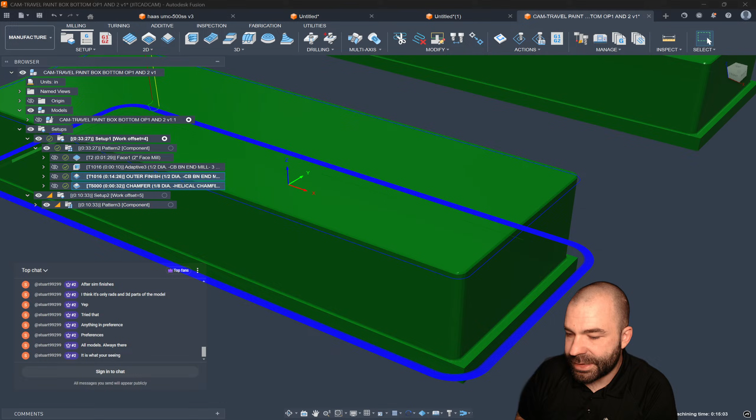All models always there - Stuart, what is it that you're seeing? I need some more information.